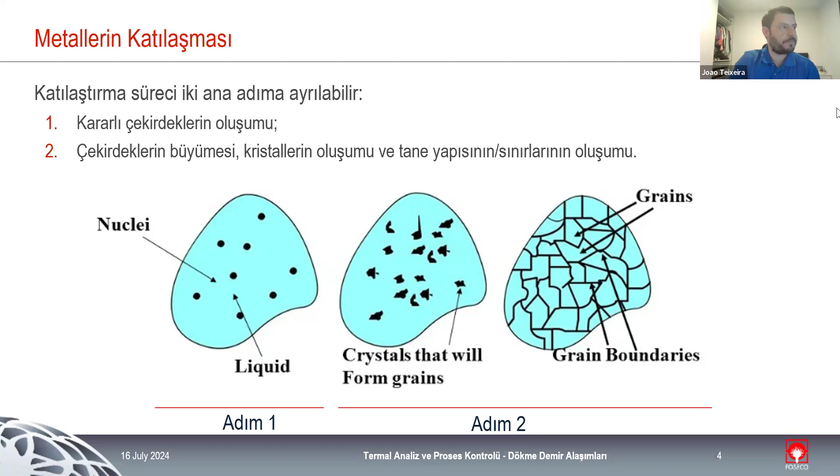And we have two main types of nucleation of stable nuclei. We can have a heterogeneous nucleation. This is what we are trying to achieve with the use of inoculants. So basically, we are giving the liquid metal the stable nuclei for the nucleation to start. What inoculation does to the liquid metal is add points of solidification for the stable nuclei to start to grow. This way, it's less energy consuming, and we can achieve a solidification in less time than if we don't have any type of inoculation.

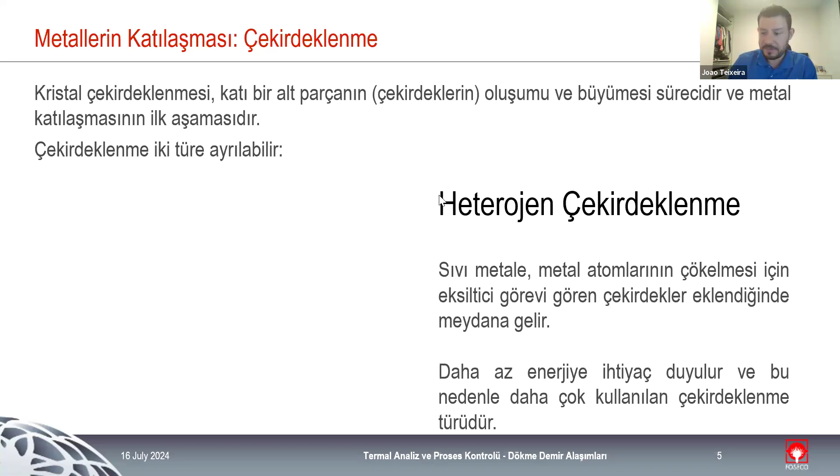The other type of nucleation is called homogeneous nucleation, and this one is achieved when we don't have any type of inoculation. So when you don't give anything for the stable nuclei to grow to the liquid metal, and we just give time for the solidification to happen, this type of nucleation takes a long time. Normally, we don't like this because, as mentioned, it takes longer time, and we have a lot of problems associated with this, especially with the presence of carbides. So again, it's a second part of the importance of inoculation.

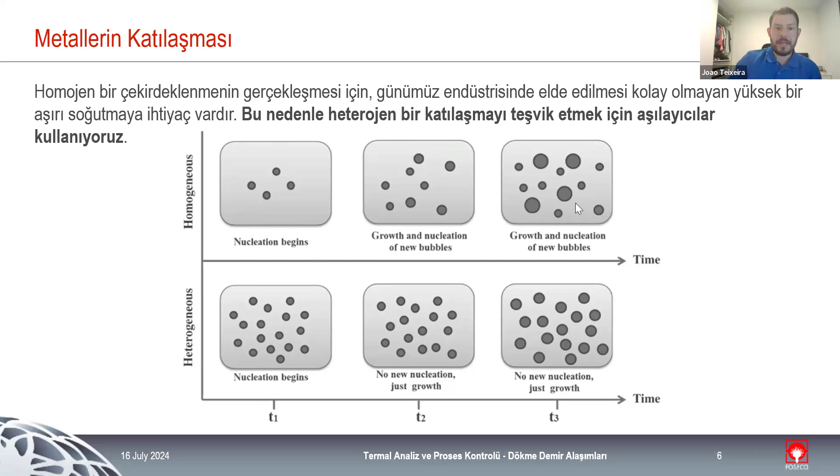It is to achieve a quicker solidification by adding stable nuclei for the nucleation to happen, and to allow time for the carbon to transform into graphite and not into carbides. So inoculation has these two different important aspects. And in this image, we can see the big difference between having a heterogeneous nucleation and a homogeneous one. At the end of the heterogeneous nucleation, you can see that we have a lot more stable nuclei than at the same time with the homogeneous one. So inoculation is a really, really important step in cast iron production, mainly for the stable nuclei to be added to the liquid metal.

And this is basically the scheme of how solidification happens in the liquid melt. If you don't give anything to the liquid metal, the solidification happens from where it is colder to where it is hotter. So when we pour the liquid metal into a sand mold, a green sand mold, for example, the solidification happens from the boundaries of the sand mold to the center. So it's one direction only. Only at the end, and you can see here in the image, we have what is called equiaxed grains, grain boundaries. So they are not one directional. They are nucleating randomly in the melt.

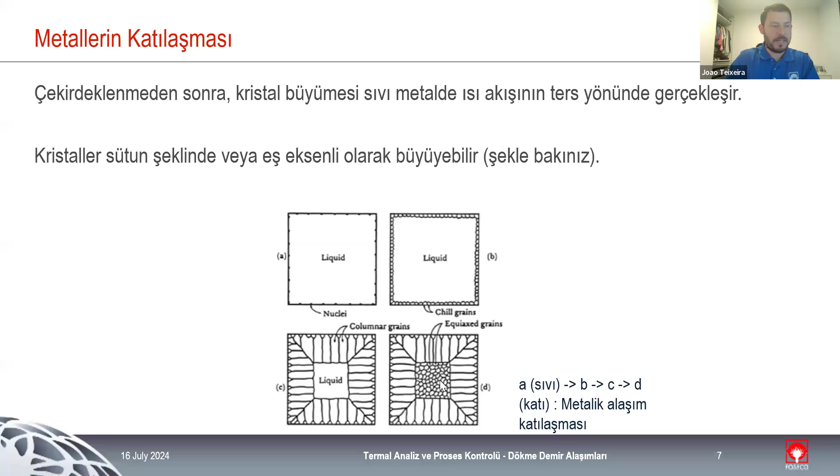The main objective with the inoculation step is to have this type of nucleation happen at random spots inside the mold and not have a one direction solidification of the cast. And this is basically what we have with heterogeneous nucleation. So we are adding an active element, barium, zirconium, aluminium, calcium, bismuth, lanthanum, whichever we are adding. There are some differences that we are going to discuss later on, but we are adding a substrate for the nucleation to happen. And it is basically what we have in this image. We have a substrate and the nucleation happens around the substrate. The graphite particles grow around the stable nuclei that we gave to the liquid metal.

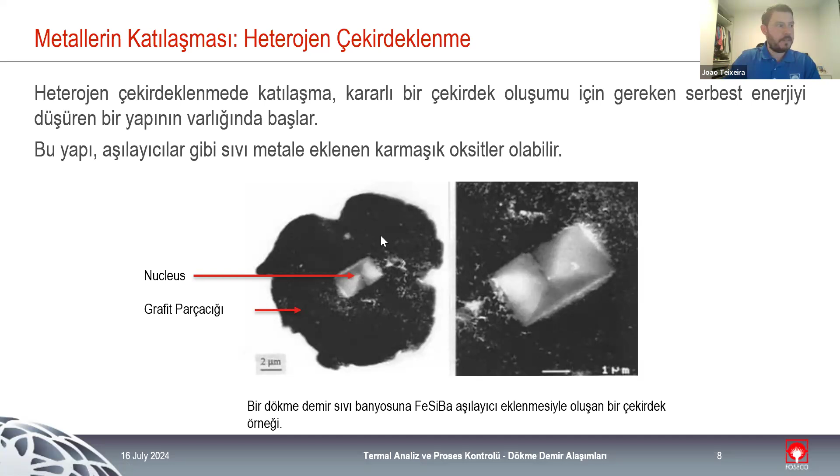And nucleation happens after that. So we have random spots inside the liquid metal with stable nuclei. The stable nuclei start to grow, to get bigger as time goes on, as solidification happens. They start to go against one another. And at the end, we have what I showed in the first picture. We have grain boundaries and we have a lot of stable nuclei growth inside the liquid metal.

What we have here is the scheme for all types of ferrous and non-ferrous solidification. So this type of solidification is the same, either we are dealing with cast iron, aluminum alloys, or brass alloys. The basis of solidification is the same. Stable nuclei, growth, and grain boundaries at the end. And this solidification always happens the same. As you can see here, these are what we call dendrite branches. And these dendrite branches start to go against one another and they start to solidify together. And this type of solidification happens in all ferrous and non-ferrous materials. So it's the same, either we are dealing with cast iron, with aluminum, with brass alloys. The bases are always the same.

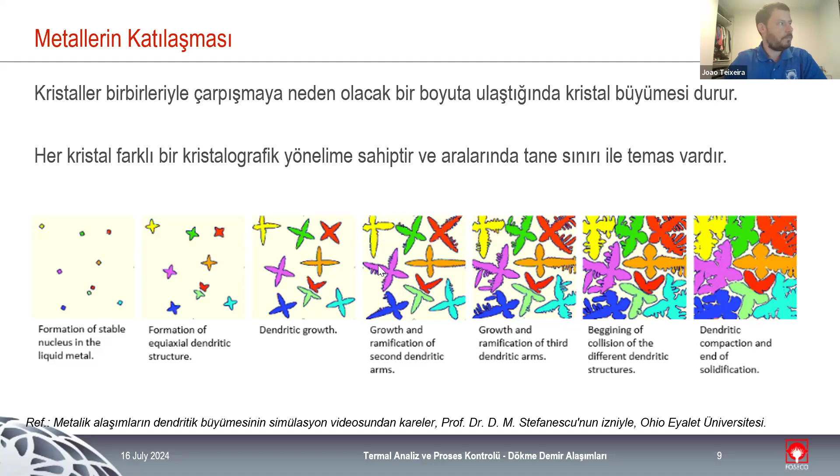Just a quick summary of what we discussed until now before going to the next topic. It is really important to control and to know, during solidification, the chemical composition, because we are adding inoculant agents, we are adding magnesium agents, so we are adding a lot of different chemical compositions to the melt. So we need to have a correct understanding of what we are adding and the effects of what we are adding.

Solidification happens always in the same manner. Formation of stable nuclei. This is helped with the inoculation process, the inoculation step, because we are adding active elements to help the formation of stable nuclei. Stable nuclei grow. They start to go against one another and to form crystals and to form the grain boundaries, grain structures that we see in the microscope when we polish a sample and we go to a microscope to have a metallurgical analysis.

And basically, we have two types of solidification. Homogeneous solidification, where we don't do anything to the melt, so we don't help the melt with inoculation. So the solidification happens during time, it's less effective. And the heterogeneous nucleation, where we help the melt with the addition of inoculants. And this was just for us to remember some concepts and to align some general concepts of solidification.

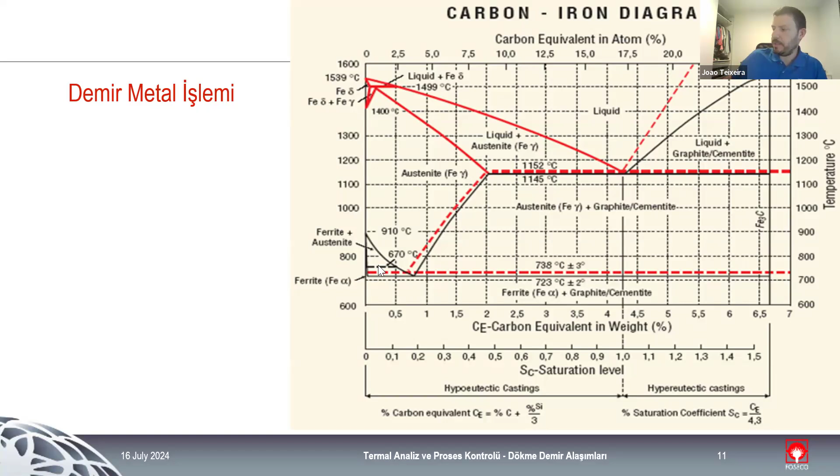So basically, to start, all of us know the definition of a ferrous alloy, but we are going to start here with the basics. We are dealing with cast iron, and cast iron is a ferrous alloy. Most of the main component of a ferrous alloy is iron. However, cast iron is a really particular type of material, because even with iron being the main element present, we have a significant amount of carbon as well. So what we call cast iron is basically iron and carbon.

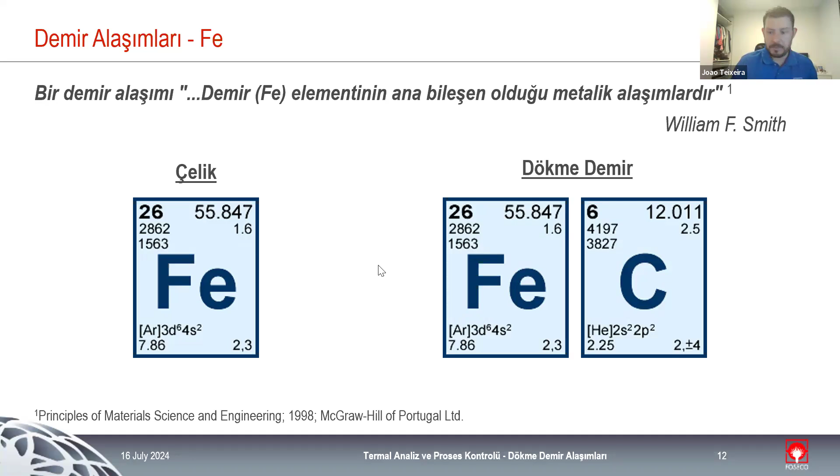In opposition to steel. Steel is mainly iron with a low percentage of carbon. So if we are dealing with cast irons, we are always dealing with the relationship between iron and carbon. And one of the easiest ways for us to understand the relationship between iron and carbon is by studying the phase diagram. And the phase diagram is basically a graphical representation of the physical states or phases that change under temperature and under pressure and under chemical composition.

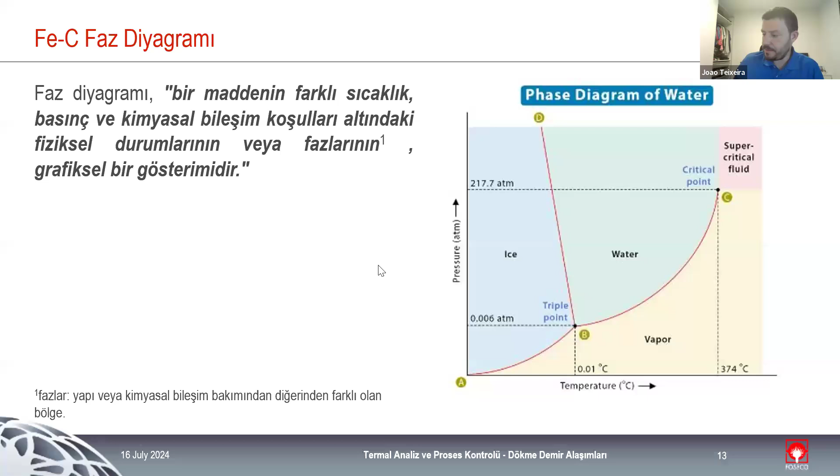So in here we have the most simple one that we have, the water phase diagram, and you can see all the different stages of the water, either gas, liquid, or solid, in the 2D phase diagram. And for carbon and iron, it is basically the same. We are having a representation of all the different stages depending on temperature, pressure, and chemical composition of cast iron. And we have a couple of important spots to know and to discuss.

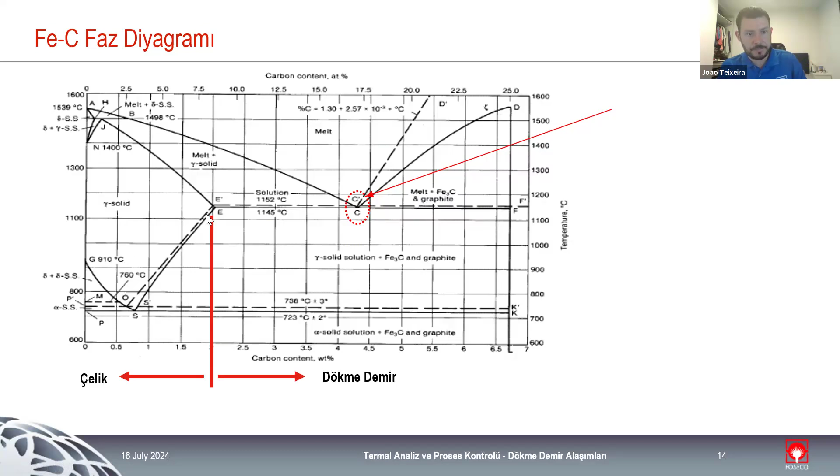One of the main ones is the point where we differ between steel alloys and cast iron alloys. As we discussed, steel is basically iron with a low percentage of carbon, and the separation is around 2% carbon. So everything lower than 2% carbon is considered steel, so it's not cast iron, and we are not going to discuss it here. Everything to the right of the 2% carbon is considered a cast iron. So this is a really important point for us to distinguish between steel and cast iron.

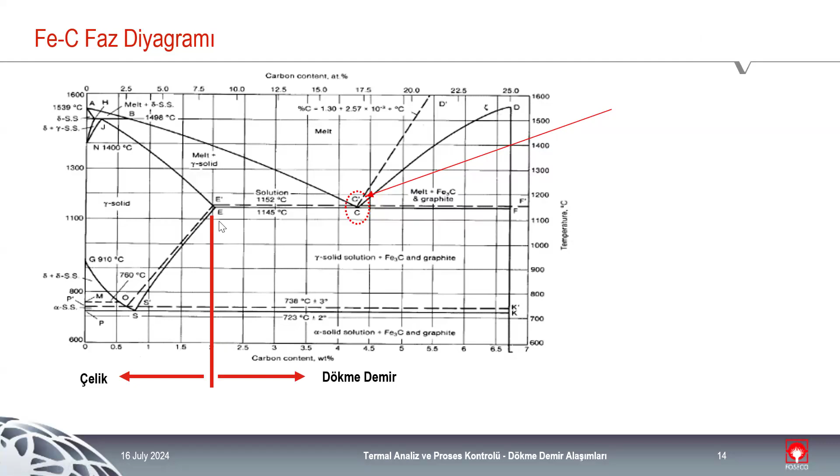And another important point is the eutectic point that we have at 4.3% carbon. This is the point of separation between the three different solidifications that we can have with cast iron. We can distinguish cast iron, and again, this is the same for graphite, for gray, compact, and nodular. The concepts are the same.

We can distinguish the solidification type based on the amount of carbon that we have. If we have 4.3%, we have the eutectic point. We call it a point, but in reality, it's more of a smaller area. It's not considered a point, but for easier explanation, we call that a point, around 4.3%. It's a eutectic solidification. It's the eutectic point of cast iron.

If we have less than 4.3%, we have a hypoeutectic solidification. And if we have more, we have a hypereutectic solidification. And we are going to see that this is really important for understanding the solidification and for understanding the different impacts that we have, especially in the gating system and in the mechanical properties of the cast.

Before going to that, just an overview of some important points of the phase diagram. So everything over this line is liquid. So this is a liquidus curve. Everything over this line is considered liquid. In here, we have a semi-solid state. So we are losing temperature inside the ladle or inside the mold, and we are starting to have a mix of solid with liquid.

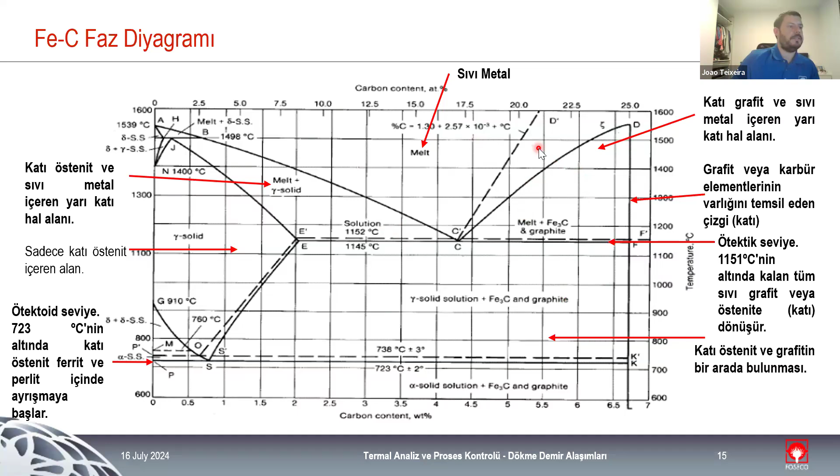And in here, you can see the different steps for the solidification of the different types of cast iron. So for hypoeutectic solidification, and this is, again, with carbon percentages lower than 4.3%. So we are on the left side of the eutectic point. And it doesn't matter if we are really far away from the eutectic point or really close to the eutectic point. The whole area is considered hypoeutectic solidification, with different impacts in mechanical properties and solidification, but it's all considered hypoeutectic solidification.

And we can see that we are going to lose temperature. We have a point here. It doesn't matter the percentage that we are going to have for carbon, they are losing temperature. And when we reach the liquidus temperature, so when we reach the point where we have a mix of liquid and semi-solid state, the first solid phase to form is austenite. So we have liquid metal and we have austenite being formed. And we are continuing to lose temperature. And when we reach the eutectic level, at 1151, 1152, around these temperatures,

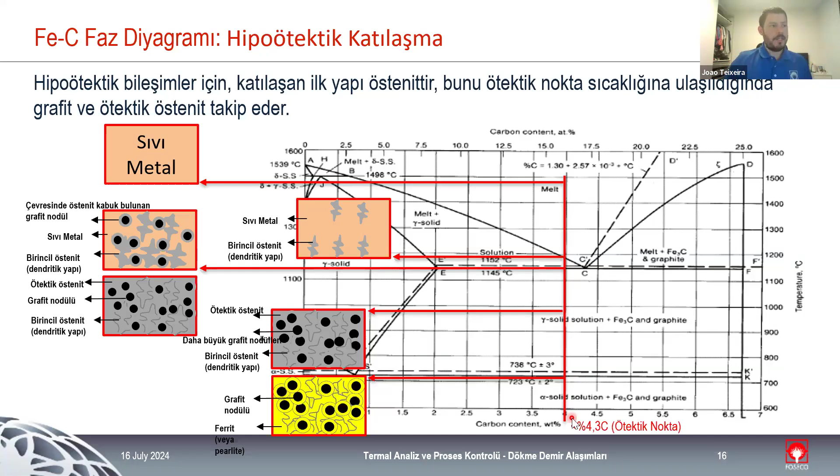we have the start of the graphite phase. So after this point, we have a mix of austenite and graphite being formed. And this is what happens until we have the cast part solidified. And the same principle is used for hypereutectic solidification. So we have a point, we are on the right side of the eutectic point, so we have more than 4.3% carbon. And when we reach the liquidus curve, the first phase to transform is graphite, not austenite.

And this is really important for a lot of different reasons. The main one is for the design of the gating system. When you have a lot of graphite being formed really early during solidification, we have what we see here in this small picture. We have big nodules and we have small nodules. So we have a really quick expansion of the graphite. This is important for some applications where we need this quick expansion of graphite.

But at the same point, we have a lot of problems with this. The main one is that the graphite being less dense than the liquid metal, the graphite nodules, I said nodules because I'm thinking about nodular cast iron, but the graphite being less dense starts to go to the surface and it can block the gating system.

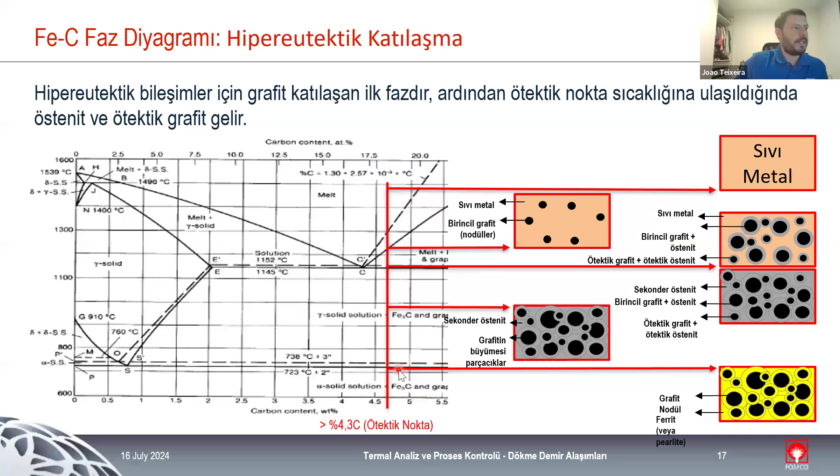And the last stage, that is a mix of hypo and hypereutectic. It's when we have what is called eutectic solidification. So when we are really close to the eutectic point, and again, we call it the eutectic point, but it's an area, a small area around the eutectic point, around 4.3%, and austenite and graphite grow almost at the same rate. Most of the applications tend to look at this type of solidification because we have the best of both worlds. We have the expansion of graphite and the solidification of austenite happening at the same time. So to counteract some problems like shrinkage and porosity, normally this is the type of solidification that companies try to achieve. It is not easy because it's a smaller area

to control. So the chemical composition needs to be really, really controlled. But normally it's what the companies try to achieve in most of the casts. So these are the different types of solidification that we have with cast iron.

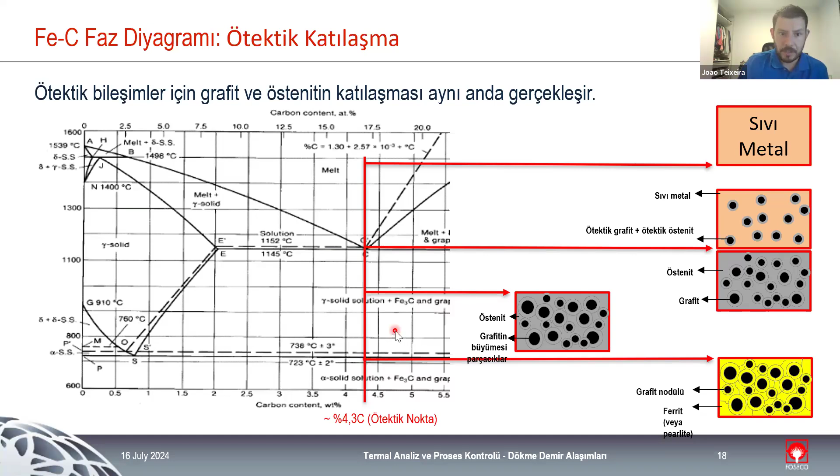And as already discussed, this is not the only thing that we need to understand during solidification, because we are going to add a lot of different chemical agents, chemical alloys, to the melt during solidification. If we are dealing with compact and nodular, we are going to add magnesium to change the shape of the graphite. But whether we are dealing with gray, compact, or nodular, we are going to add inoculants to try to promote the transformation of carbon into graphite. So we have both treatments happening.

Ferrosilicon magnesium to modify the structure of the graphite particles, to go from gray to compact to nodular based on the amount of magnesium that they are going to add, and inoculant with active elements to promote a stable solidification of carbon. And the stable solidification of carbon is basically allowing carbon to transform into graphite and not to transform into carbides. Most of the cases where we find carbides in the cast, it is because the inoculation process failed at some point. Either it was not enough to allow the transformation of carbon into graphite, or it wasn't strong enough, so we need a stronger active element like lanthanum or bismuth, or we have problems with the design of the gating system, and there are some areas of the cast that are isolated and don't receive enough liquid metal to transform the carbon into graphite.

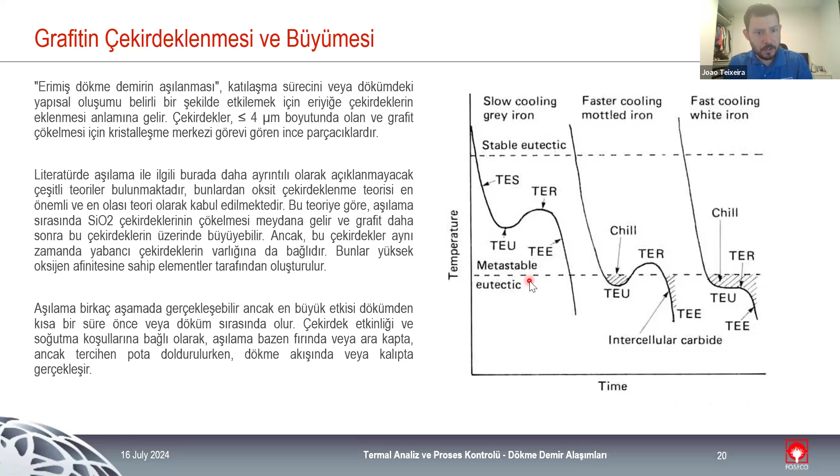Because even if the inoculation step is really, really good, if you have a good inoculant agent, but we have a high amount of these elements, we'll probably have a lot of carbides, because the affinity of carbon is really high with this type of elements. So it's easy for carbon to go and grab these elements that are free in the melt. So we need to play with both areas, with a really good base metal, with a low amount of these trace elements, and choose the correct inoculant for the process that we are going to have.

And this is basically what inoculant is. It is a ferrosilicon alloy with some active element, with some barium, aluminium, calcium, manganese, zirconium. As with everything in life and everything in cast iron production, some elements have good effects. After some time, they lose the effects. They have a quick fading time, like bismuth and lanthanum. They are really good for late stage inoculation, but they are not so good for early stages, for ladle inoculation. We have the universal inoculant with barium, with zirconium.

So there are dozens of different inoculant agents in the market, and all of them have some positives and some negatives, even if it is the price, improvement of mechanical properties. Some inoculants are more specific for gray iron, for example, with the strontium ones. Lanthanum is really good, but as mentioned, the fading resistance is lower. Cerium is really good, but in some particular cases, it could be harmful to the production of nodular cast iron. So we really need to play with all the different types of inoculants that we have, and we need to be careful with the ones that we choose, because there are dozens in the market, and most of them have different applications for production.

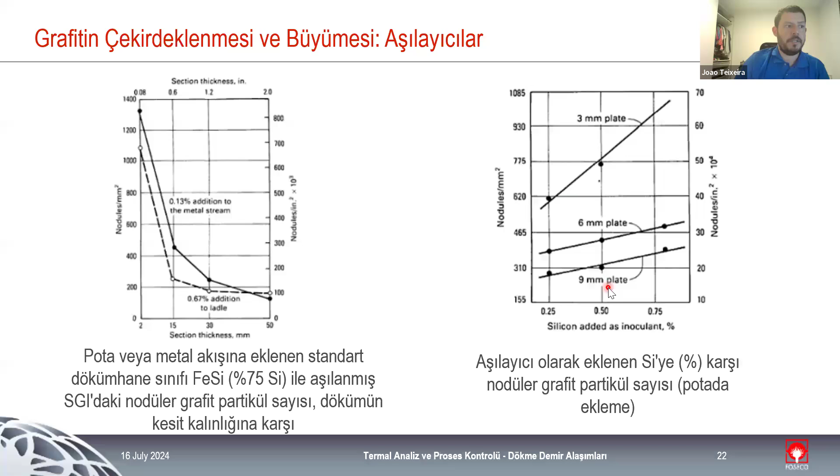And the same principle is used for the right picture. We can see that by increasing the silicon content, we increase the nodule count. Silicon is really important as an element leading to the inoculation, because it's the element that increases the window between the stable and the metastable temperature. So we can see that even by adding a simple silicon alloy to the melt, we increase the nodule count in three different sections of the cast.

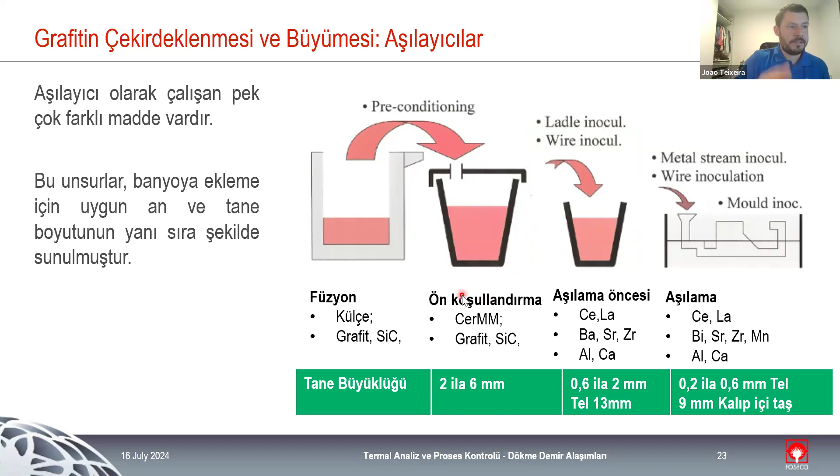We can do wire inoculation. It's a type of ladle inoculation. The only difference is that the inoculant is wrapped in a thin steel, and we have late inoculation. Could be metal stream inoculation with MSI that we are going to see further on, or in mold inoculation. And we can see the different elements that we are going to have in the different stages of inoculation. Again, ladle, in-stream, or core wire.

And for example, for in-stream, we have the MSI unit. Normally, in-stream is really popular, especially for the automotive industry, for the production of smaller casts, where we really need a lot of speed and a lot of production capacity. And it is an easy system for us to have a high replicability of the process. So we are always having the same amount of inoculant. So we can compare one cast with another on the basis of the inoculation, because we are always having the same amount based on the amount of metal that we are pouring to the mold.

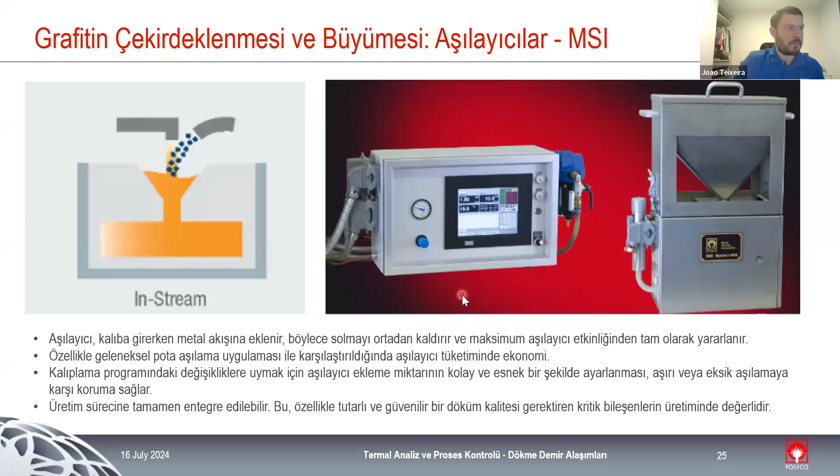This is an example of the MSI unit that Foseco commercialized, and it's really popular, especially for the automotive industry.

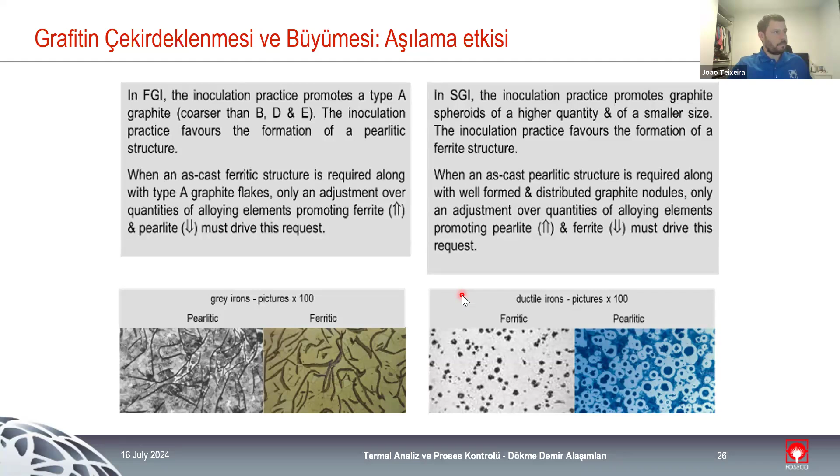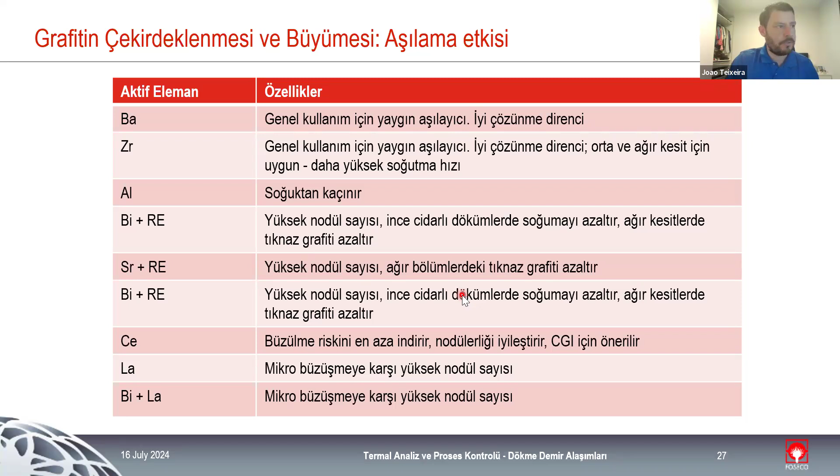And in here, we have the main active elements for inoculants. There are some other elements that are not present here, and there could be a lot of playing between one and the other, but basically it's barium, zirconium, they are the universal ones, aluminium. It's also used in 99% of the inoculants. Aluminium is really important because the crystal phase of aluminium is the same phase as for graphite, so it's easy for graphite to grow on top of aluminium crystal phase. Bismuth, rare earth, strontium ones that are really used for gray, cerium, lanthanum, and then a combination of different active elements. Bismuth, lanthanum, bismuth, rare earth. We can play a lot with this, and again, we have dozens and dozens of different inoculants in the market.

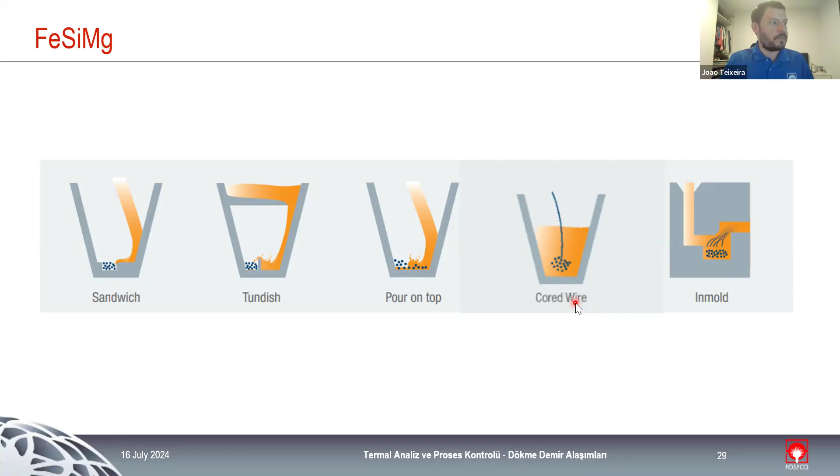This is just for us to understand that everything that we have in the base metal and everything that we had during production will have some effect during solidification. And the other treatment that we normally use for cast iron, in this case only for compact and for nodular, is the magnesium treatment. And the main ones are the sandwich treatment, simply pour on top, cored wire that is really popular at the moment, and in-mold

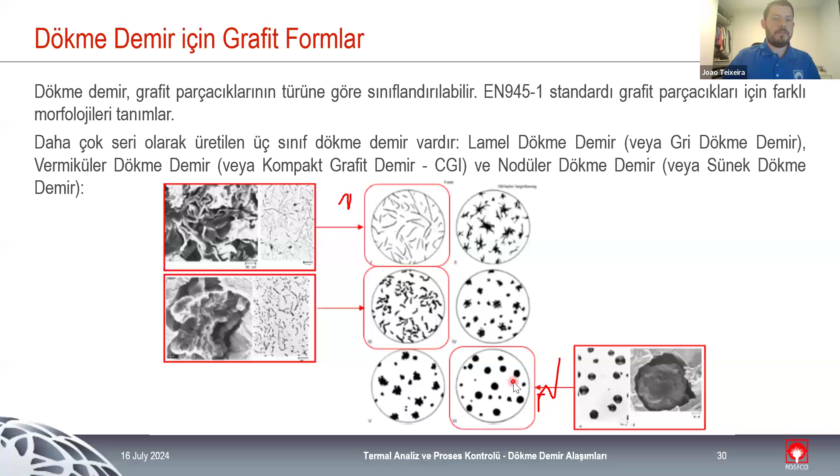nodularization. And the main goal of this step is to change the structure of the graphite. So we start with the gray structure, with the fine lines, worm-like structure of graphite. And each time we add a small amount of magnesium, we change the structure of the graphite, and we go from a worm-like structure to a nodule structure. And we can see here that this is done by adding magnesium. So if you have a low percentage of magnesium, you have the gray cast iron that we know.

And when we increase the magnesium rate, we change the structure of the graphite. Another element that is really important when we are dealing with different types of cast iron is sulfur. The sulfur in the base metal is really important because normally it could be higher when we are producing gray cast iron, because sulfur does not impact the shape of the graphite a lot. Sulfur basically blocks the growth of the graphite. But when we are dealing with nodular, normally we want less sulfur. So we need to be extra careful with the amount of sulfur, again, because sulfur is blocking the growth of the graphite nodule. And the magnesium that we add during treatment is basically to catch the sulfur that is in the melt. So if you have a lot of sulfur, we need to increase the magnesium treatment, so we need to waste more magnesium during treatment.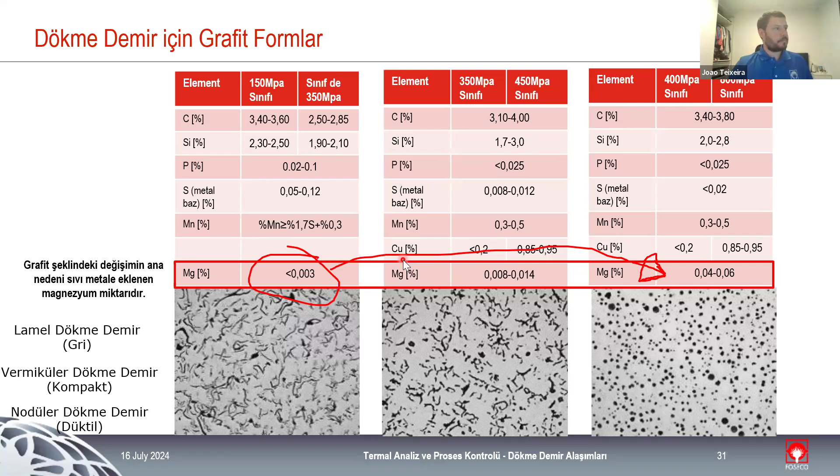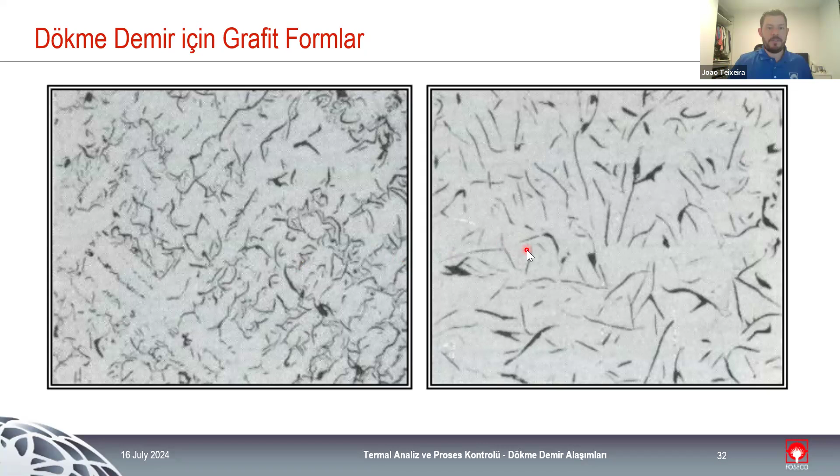This is just an example of the change between the different types of gray iron that we can have, and you can see that on the right side we have more graphite type A, so we probably have better mechanical properties and overall quality of the cast. Here it's just for us to see the difference in tensile strength between gray, compact, and nodular. So we have higher tensile strength with nodular. It's more difficult to produce, but we have more mechanical resistance in this type of iron.

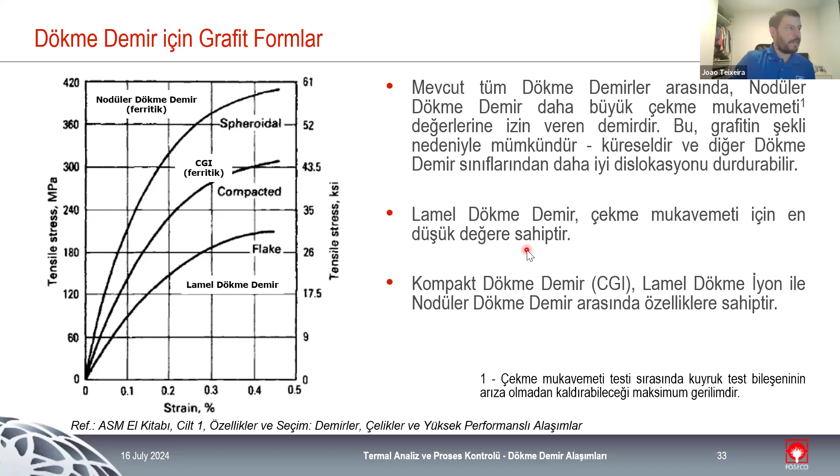And when we are dealing with nodular, we have a parameter that is called nodularity. It's the roundness of the nodules that we have. And the increase in nodularity also improves the mechanical properties. So we can play again a little bit with the alloying elements that we add to try to improve the nodularity. And there is a significant difference in some values of nodularity. So if you really need a high level of mechanical properties, especially for safety components, for calipers, for the automotive industry, for brake systems, for most of the critical safety components that we produce with nodular, we really need to achieve a high level of

nodularity. And some things that we do during the process can drop the nodularity, like the magnesium percentage that is in the melt. Normally we need to be extra careful with the amount of magnesium that we are going to add, because after some point we are going to lose mechanical properties in the melt. Again, the percentage of sulfur, because if we have more sulfur, we are going to need more magnesium, so we are going to decrease the nodularity. And some inoculants can also improve the nodularity of the graphite and the nodule count. Lanthanum, for example, is one that is used a lot to increase the nodule count and nodularity of cast iron.

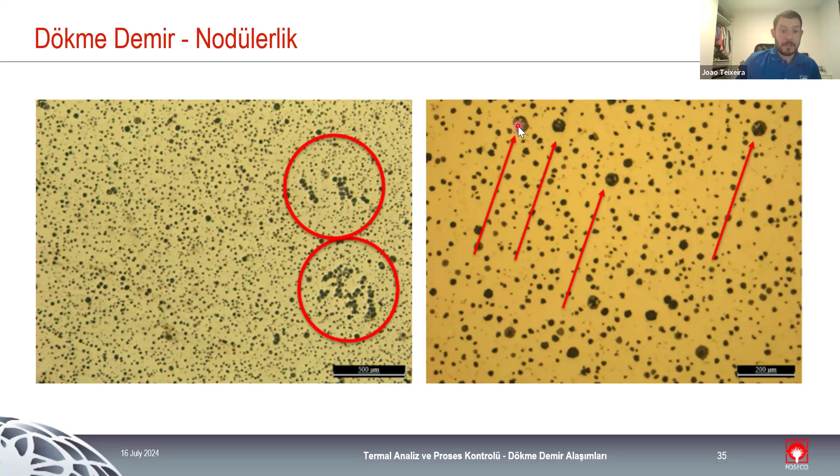And in here we can see just some microstructures of nodular cast iron, and you can see, for example, some problems that we already discussed. In these areas, we have a lot of nodules grouped together, so probably we have really high hypereutectic solidification. So we have a lot of big nodules that grow together, and this could be detrimental for the mechanical properties. And if you look closer, we also can see that we have some problems with the nodules. They are not completely round, but we had some elements that were probably harmful to the growth of the graphite nodule. So again, we need to be extra careful with everything that we add to the liquid metal, because it can affect the mechanical properties of the cast a lot.

This is a quick example of the matrices that we can have with cast iron. We go from ferritic to pearlitic, and the tensile strength increases, but also the number of carbides increase. We need to be careful, especially if the cast is going to be machined.

The main difference between pearlite and pure carbides: pearlite is also iron and carbon carbide, but the difference is that we know the orientation, so it's always in the same orientation, and we artificially promote the appearance of pearlitic structure. When we have pure carbides, like chromium carbides or titanium carbides, they are random in the cast and the orientation is not known, so we can have a lot of problems, especially during machining with this.

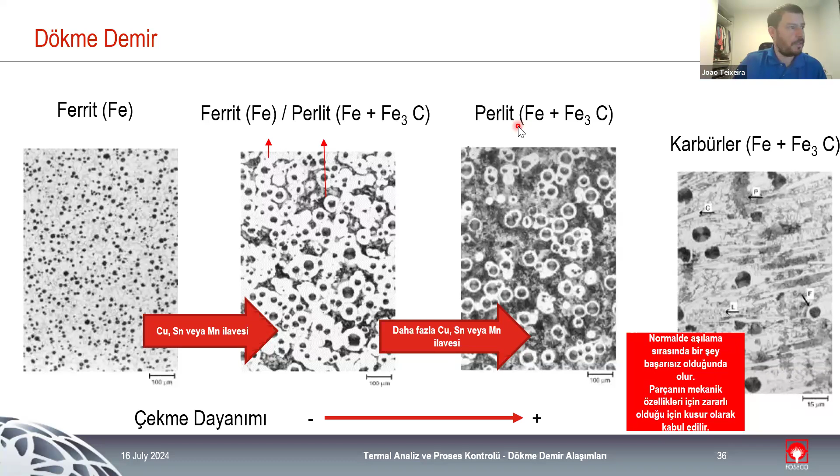You can see here that they are oriented, all the pearlitic structure that we have, normally with the addition of copper and tin in nodular iron. They are oriented, and we know this orientation, so if we add a specific amount of copper and a specific amount of tin, we are going to have a specific amount of pearlite. So we can play with these to improve the mechanical properties without decreasing a lot the machinability of the cast.

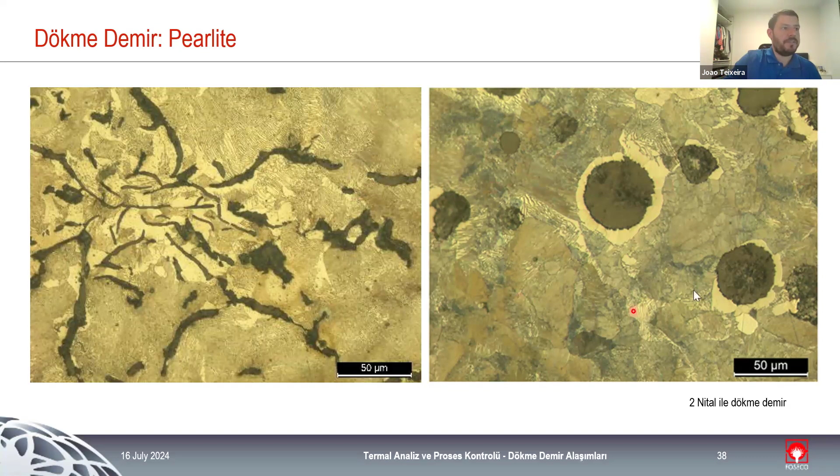This is a sample analysis with pearlite. Normally we need to etch it with 2% nital to have this appearance, but you can see that we have the graphite nodules, we have the austenite around the graphite nodules, so we had a really close eutectic solidification. Both austenite and graphite grow at the same time, so we have a capsule of austenite around the graphite nodule, and you have the pearlitic structure around.

A small summary: the phase diagram is important for us to understand the complex solidification process of cast iron and to identify the type of solidification that we are going to have, whether eutectic, hypoeutectic, or hypereutectic. The main goal of the inoculation step is to promote the stable solidification of carbon and to limit the amount of carbides that we are going to have in the cast.

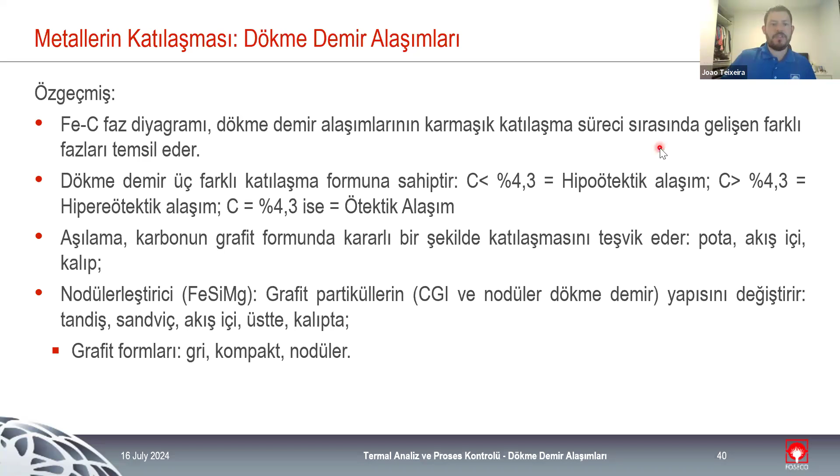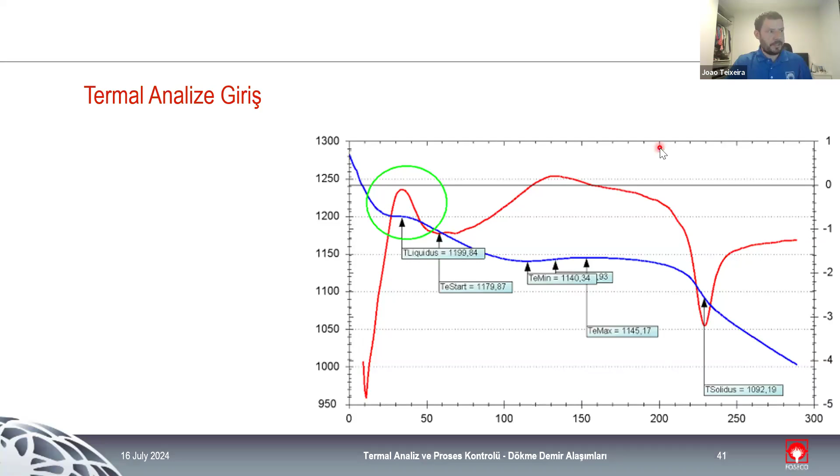The main role of the magnesium treatment is to change the shape of graphite from gray to compact to nodular based on the amount of magnesium that they are going to have. The last part, we are going to discuss a little bit about thermal analysis. We saw the phase diagram, and now we are going to see how we can use the phase diagram with the thermal analysis to determine a lot of different important topics during production.

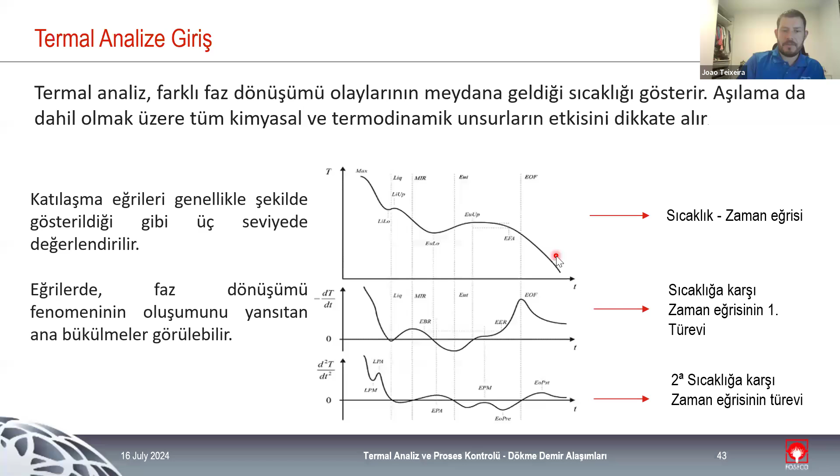Thermal analysis can be used for all types of production: aluminum, copper, ferrous, non-ferrous. It's used in a wide range of alloy production, and it's basically the analysis of the changing properties of a small sample, always related to temperature and time. So all the thermal analysis curves are always a function of temperature and time. We have temperature and time, and the curve is always based on these changes.

For the particular case of Foseco, we use a Ferrolab 5, and it's the system that you see here. The Ferrolab 5 consists of a cup and stand. The cup is where we pour the metal sample for the analysis. The Ferrobox is where we do the conversion of the thermal signal, with the thermocouple type K, to an electric signal for us to have a curve. And the workstation is where we can see the curve.

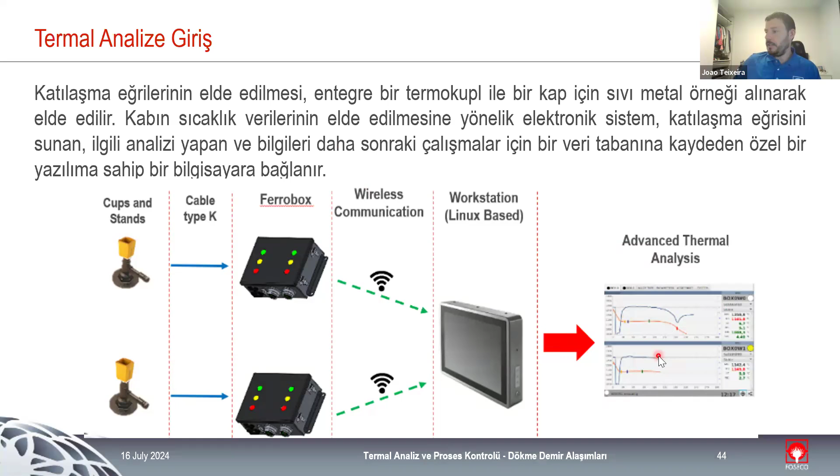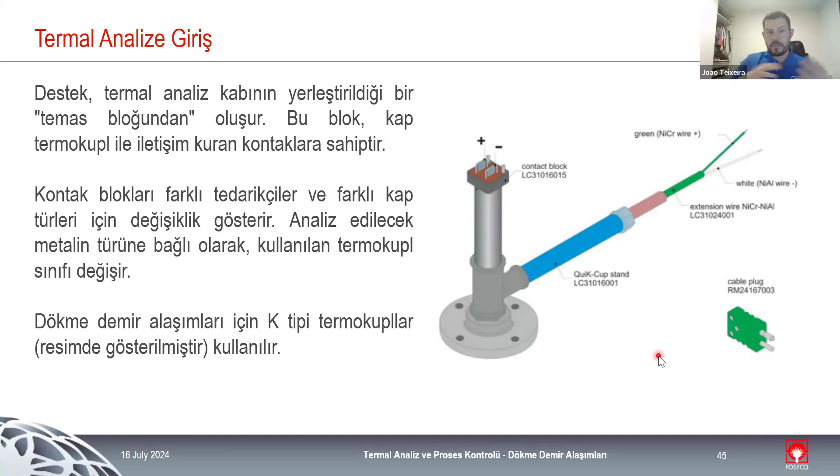The stand is basically a place where we put the thermal analysis cup that connects the thermocouple to the whole system, to convert the temperature into an electrical signal.

Thermal analysis can be used in different stages of production. It can be used in the base metal for us to know the liquidus temperature, the carbon content, the silicon content. Especially the carbon content is really important with thermal analysis, because carbon content is difficult to obtain with a spectrometer.

Because carbon is a non-metallic element, normally a system like LECO should be used to have a really high degree of correctness of the carbon content. It's really hard for the spectrometer to give this value correctly, and thermal analysis can do it really easily, with good replicability over time. For this type of analysis in the base metal, we use cups with tellurium.

The tellurium is there to consume all the carbon and transform it into carbides, to speed up the solidification process. So we don't have anything happening in the eutectic, we get a straight line, and it's easy for the system to identify all the different spots that it needs to identify. During production, after magnesium treatment and after inoculation, we want to see the changes in the melt with these production steps, so we use cups without anything.

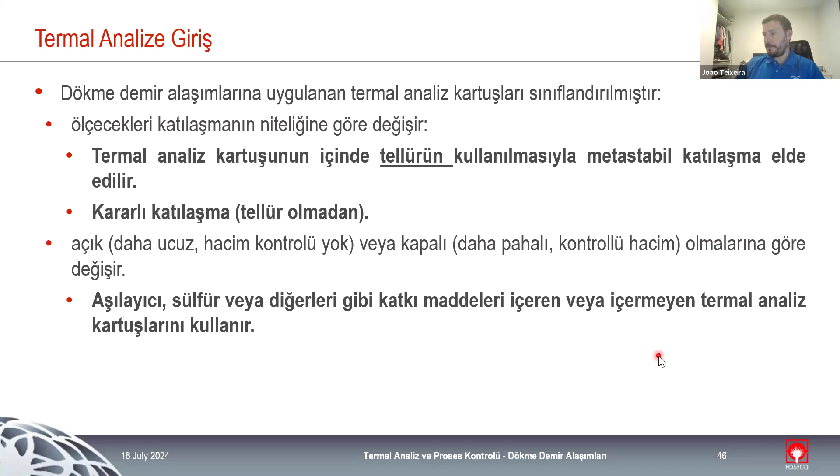And again, we have the phase diagram, and I just want to point out that we are always talking about carbon content, but in reality, and as we already discussed and you are all aware, we have a lot of other elements that are present in the melt, especially silicon. After carbon and after iron, it is the element that we have in higher amount in the melt.

So for the study of the phase diagram and thermal analysis, we change the carbon content for what is called the carbon equivalent. That is a mix of carbon plus 1/3 of the silicon content. And we use this value to determine the point in the phase diagram that we are at a given time, either at production or in the base metal.

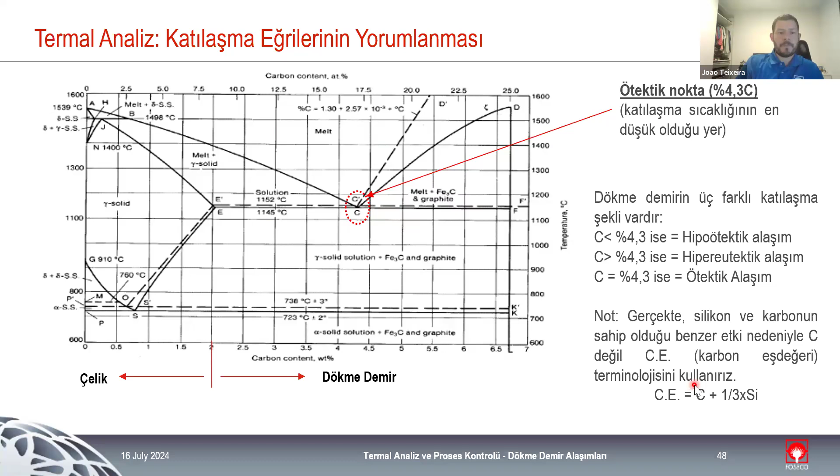And we can see here that the thermal analysis is basically mimicking the phase diagram. So every time we cross a phase in the phase diagram, we have a correspondence in the thermal analysis. So we change from liquidus to semi-solid state, we have an inflection. We reach the eutectic line, we have an inflection. So every time we have a phase transformation in the phase diagram, we have the equivalent in the thermal analysis. So we can always know where we are at a given point.

And the curve is basically this. We have the main curve, temperature and time. The blue one is the first derivative. The first derivative is, every time we have an inflection in the main curve, we have a zero, so we have a change of direction in the first derivative. It's just for us to have higher control of the points where some changes happened.

For example, here we reach liquidus temperature and we have a change in direction. We achieved the minimum temperature. We have another change in direction. And you can see all the different parameters that we can control with thermal analysis. In this case, because we have a eutectic minimum and maximum, this curve was taken after production, so with the cup without tellurium. And we have values for the magnesium treatment, if we are dealing with that, or the inoculation treatment if it was done.

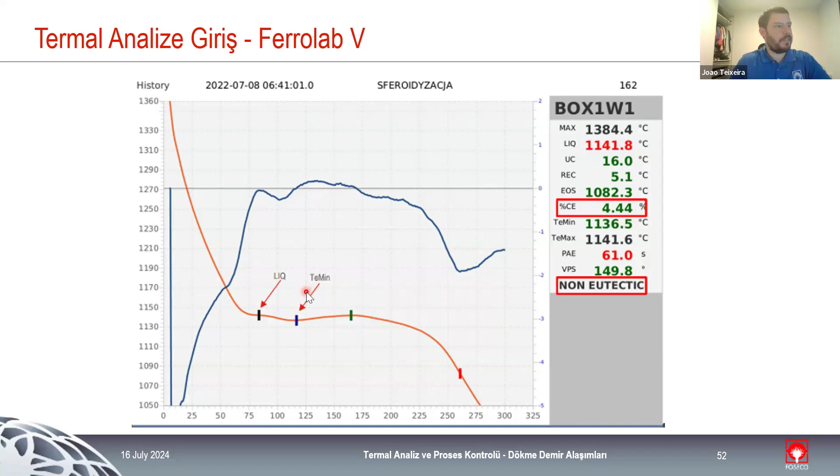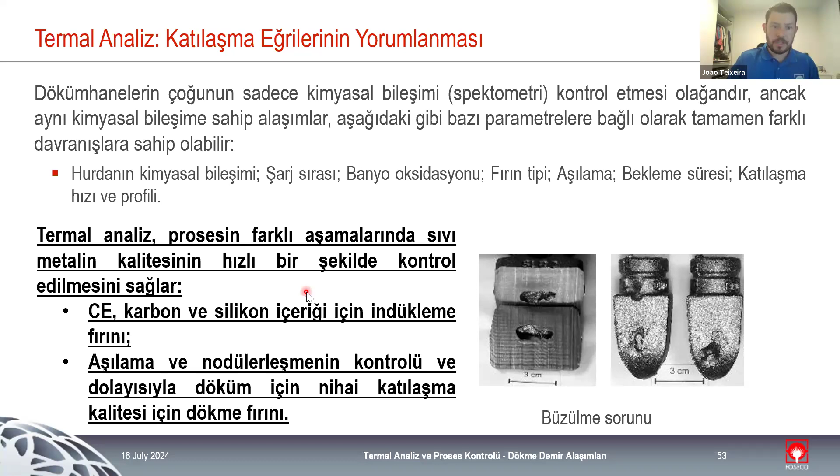This is just a resume of what we discussed: we use thermal analysis in the melting furnace to control the carbon equivalent, carbon and silicon, and the liquidus temperature, to know which point of the phase diagram we are at and what type of solidification we have. And after treatment, you use thermal analysis to know the inoculation effect and nodularization effect of the process.

We already discussed this, but in this part we have the graphics. For metastable, so with the cups with tellurium, the main objective is to only know the carbon content and the silicon content. So we consume all the carbon in the sample. We don't allow the carbon to transform into graphite. So we have a straight line at the eutectic point, as you can see here. So we don't have any type of transformation affecting the readings of the system.

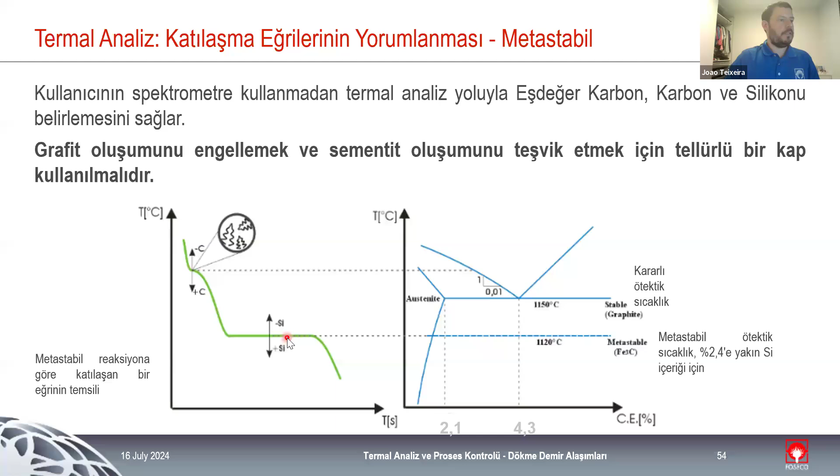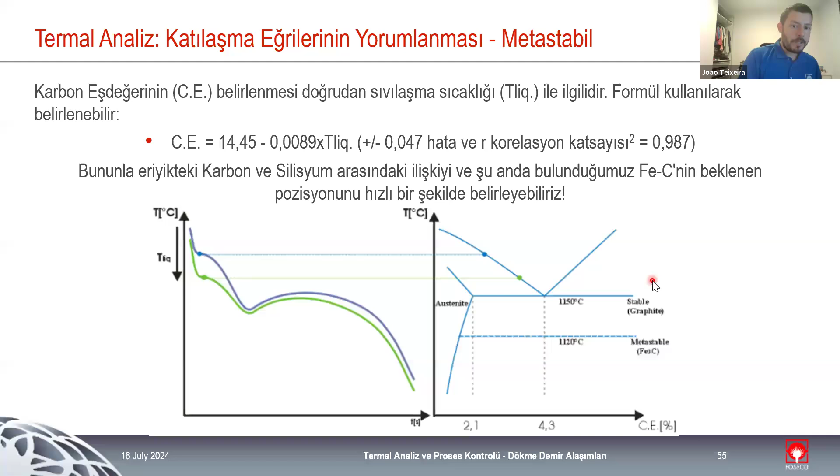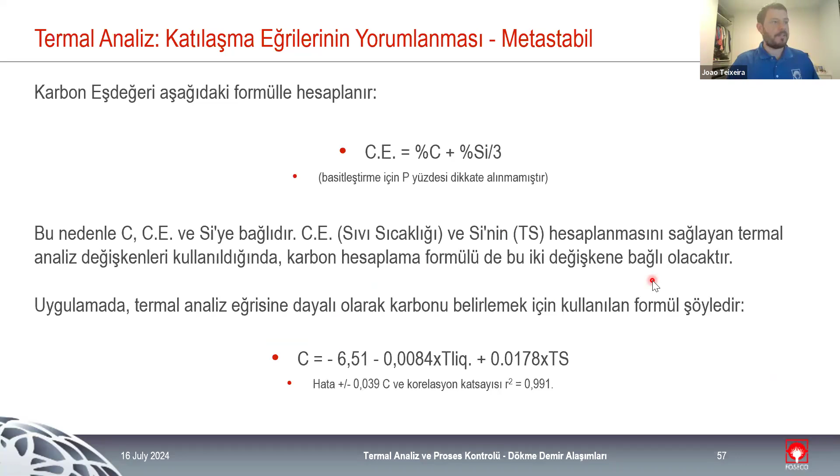This is just for us to understand that we can determine the differences in carbon content with thermal analysis when we are dealing with the metastable solidification. And this is just a formula for silicon. It is dependent on the metastable solidification. The formula for carbon equivalent that we already discussed, and the formula for carbon that is dependent on the liquidus temperature, as we discussed two slides before. And in here, it's just for us to see that the different points in the thermal analysis represent different points in the phase diagram, like we discussed already.

When we are dealing with the stable solidification, we have the three types of solidification that we already discussed: hypoeutectic, eutectic, and hypereutectic, and each one with differences in the phases being formed first. Hypoeutectic with austenite being formed first, and the graphite being formed at the eutectic. The eutectic point, where the graphite and austenite form at the same time, so the inflection that we have at the eutectic is bigger because we have both phases being formed at the same time.

And the hypereutectic solidification, where the first phase being formed is graphite and later on austenite. And you can see that the curves are slightly different, especially the hypereutectic, because we normally have two big inflections. The first big one with the graphite being formed at early stages, and a second smaller one with some graphite still being formed and austenite at the eutectic level.

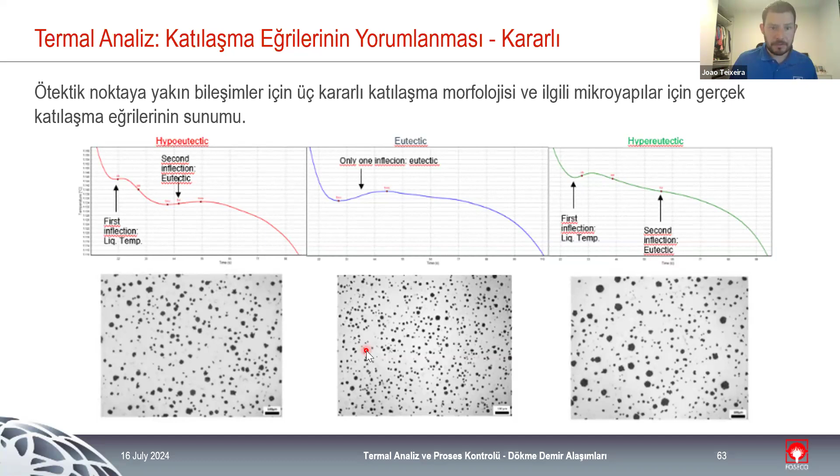The main difference between hypo and eutectic is, in this case, the nodule density. We have more nodule density at the eutectic phase because it happens in a single area, and it's not a mix of different points where the solidification of graphite happens. So we have a higher amount of nodules being formed in a single phase.

And again, this is just for us to have an idea that different elements promote different types of solidification and affect differently the metal that we have. We have strong graphite promoters, so elements that are good for the transformation of graphite: silicon, as already mentioned, aluminium, as already mentioned again. We have elements that are not good for the formation of graphite, like phosphorus and arsenic. So we need to manage and we need to control these elements really carefully in the base metal.

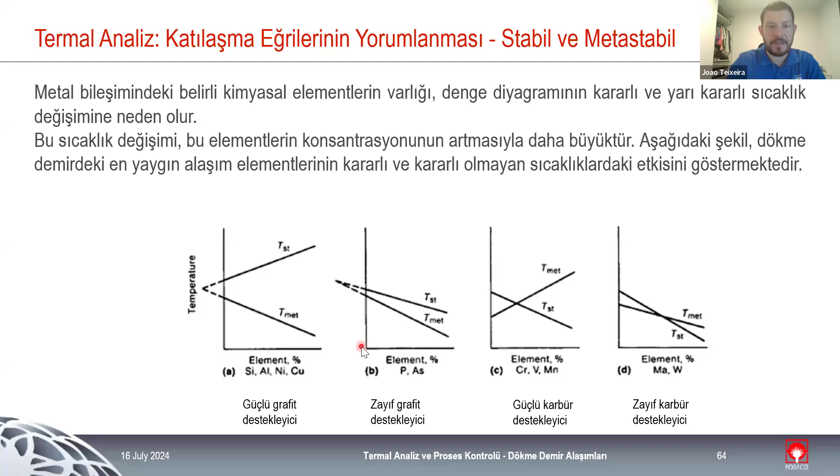We have the carbide promoters, chromium, vanadium, that have a high affinity with carbon and can steal the carbon and transform carbon into carbides. And we have weak carbide promoters like tungsten and other elements that carbon does not have a high affinity with, so they don't affect the ability of the carbon to transform into graphite.

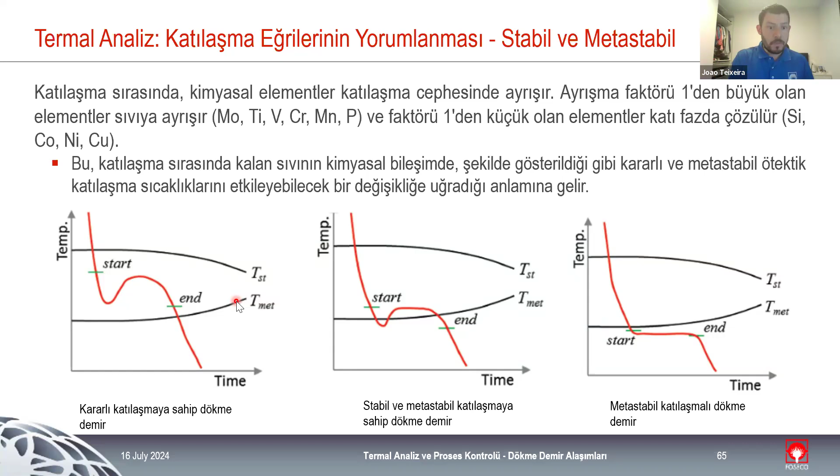And this is just for us to see in more detail the difference between the stable and the metastable temperature. It's between these temperatures that the inoculation step happens and the nodulization step happens. So it's really important for us to control how we achieve both these temperatures in production, and to understand that most of the treatments that we do should happen between these two temperatures. So we need to monitor them, and thermal analysis is really good for this. And we need to control the elements that we are going to add to the melt.

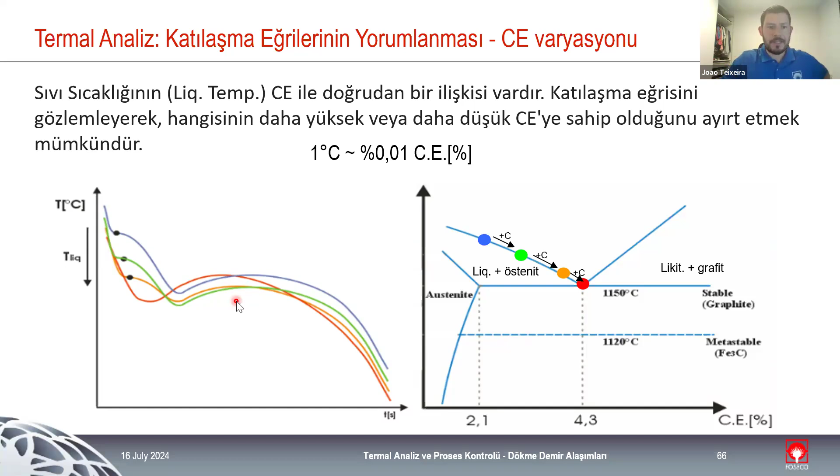And this is just to show that this is really important, especially for production, when you are moving a ladle from one side to the other to pour it into the sand molds. Each degree that we lose in temperature, it's 0.01% carbon equivalent. So we are losing carbon each time the temperature drops. So we need to also control really, really carefully the temperature when we are producing. This is, again, just for us to know the different elements and the effect that they have.

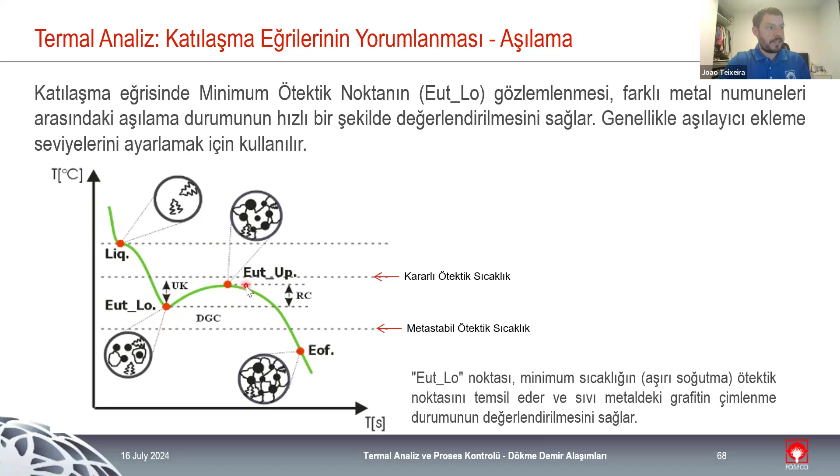And we can see that even a small amount of inoculation is enough to transform a lot of carbides into a lot less carbides. So we push the eutectic minimum from 1125 to 1139, and we improve the inoculation step and the ability of carbon to transform either into graphite or carbides. We improve this with a small amount of inoculation. This is just the importance of the eutectic minimum that we are discussing so far.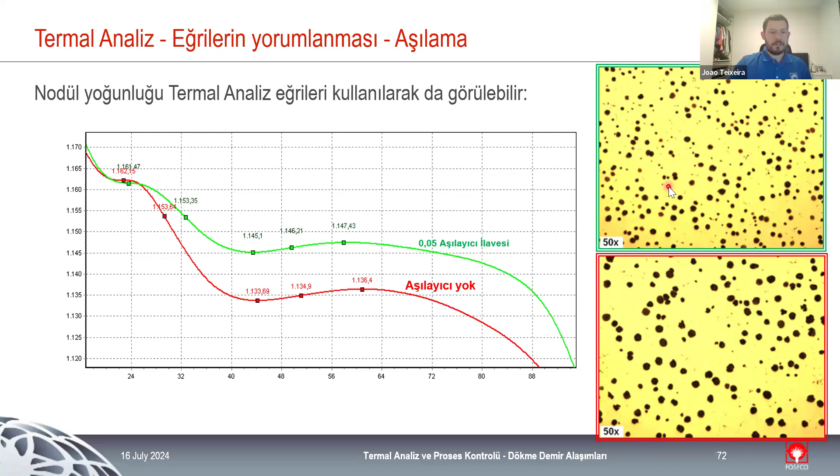And in this particular point, lanthanum, cerium, for example, bismuth, they are really important because they are really, really strong nodule density promoters. And normally when you need to increase the nodule density, and by increasing nodule density, normally you increase mechanical properties. These are good examples of inoculants that we should use.

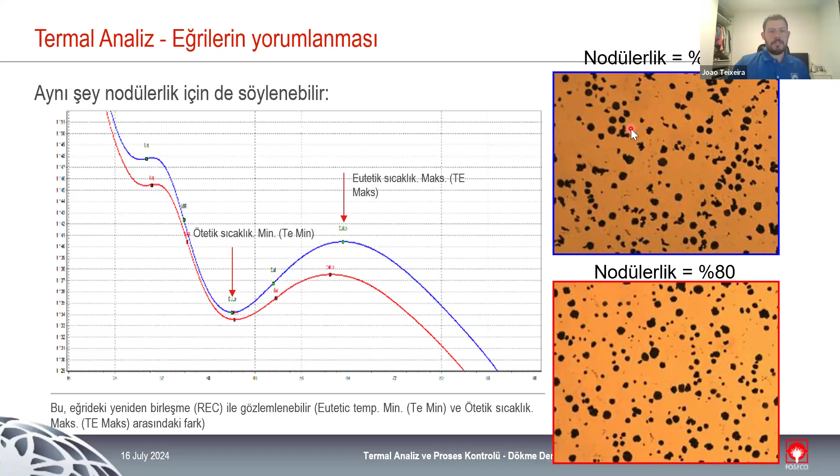And another important aspect of nodular production is the nodularity and the control of the recalescence, the difference between the eutectic minimum and maximum. And you can see that when this recalescence is lower, we have a high nodularity, around 80%. And when it's higher, we have a lower nodularity, around 65%. So recalescence is also an important parameter to control in thermal analysis during nodular cast iron production.

And this is just to illustrate normally the big problems that we have during cast iron production, the shrinkage problems. And shrinkage is basically a small area of the cast part that we are producing that at some point during solidification was isolated during solidification. And it was isolated because of dendritic growth, and we saw that every alloy grows as a dendritic structure. The branches close early on during solidification, and they isolate a small area of the cast.

And we have a shrinkage problem later on because we don't have any liquid metal to expand and to counteract the contraction of the liquid metal. And one way that we can control this is with thermal analysis as well. It's a good indication, and it's a good tool to study the dendritic growth and the expansion of graphite, and of course the careful use of feeders in the casts, especially the big casts.

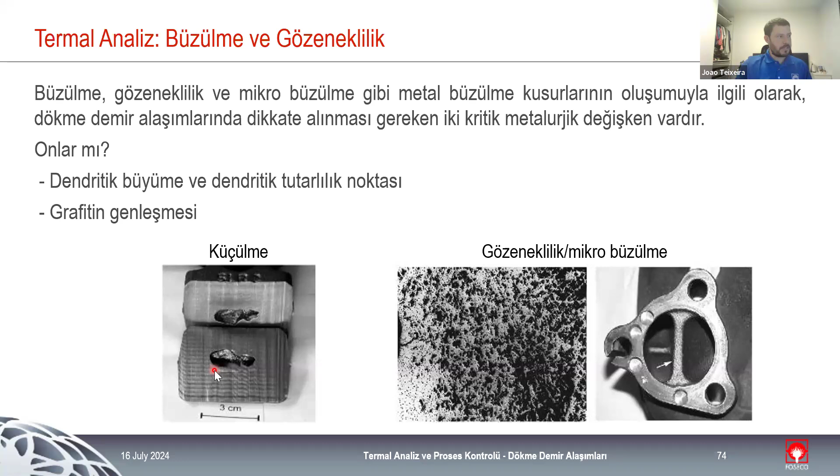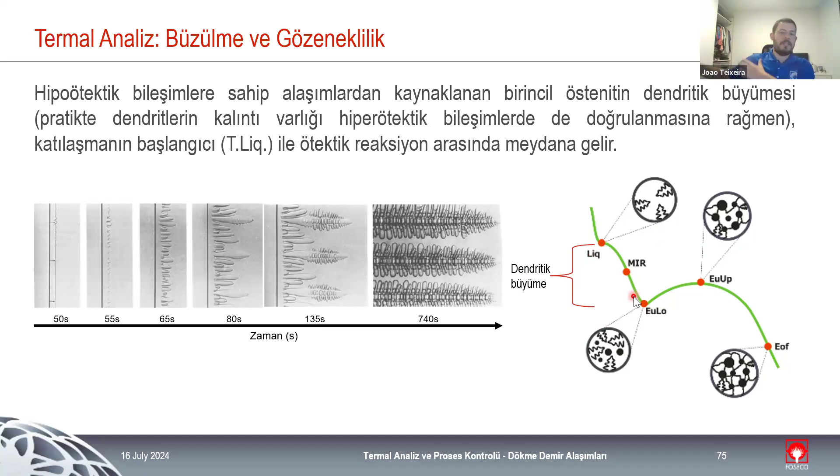And so the thermal analysis is important to control this dendritic growth, because most of the dendritic growth happens between the liquidus temperature and the eutectic low temperature. So this is another thing that we can take from thermal analysis when we are going to study thermal analysis, and when they are going to compare a lot of different production data with thermal analysis.

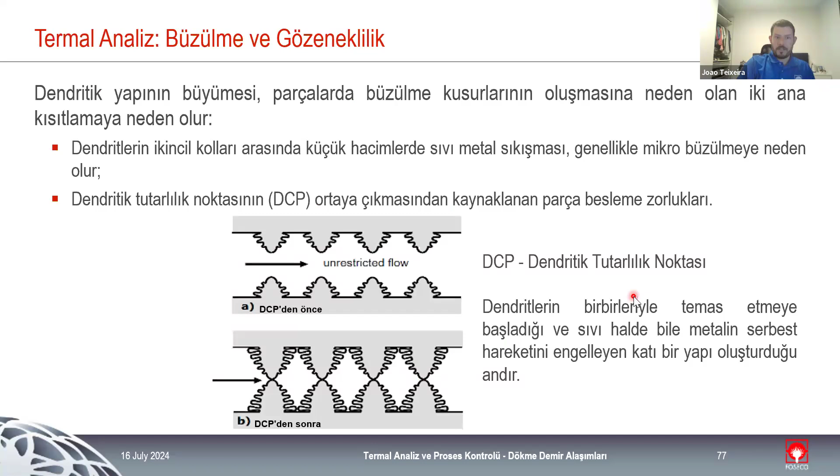And this is just an example of some dendritic structures that you can find on some microstructure analysis. And this is just an illustration example of what is called dendritic coherence. It's the point where the dendritic branches close and isolate a section of the cast, and we have a shrinkage or a micro shrinkage because of this.

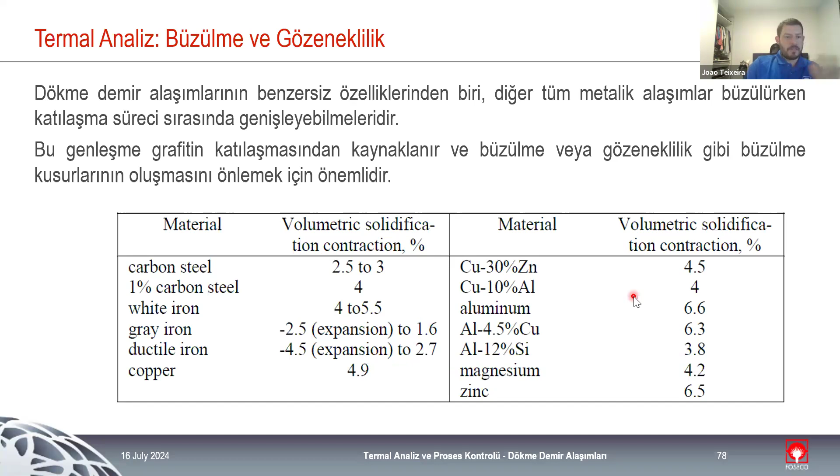Of course, we can counteract this problem in the particular case of cast iron because we have graphite, and graphite is the only element that expands during solidification, and we can use that expansion to counteract the problems of shrinkage and micro shrinkage. If we are dealing with steel, for example, or with aluminum or copper alloys, we don't have anything that is expanding during solidification. Everything is contracting. So we need to be even more careful when we are going to design the gating system and all the systems to feed the die.

When we have micro shrinkage, so shrinkage that is really small, sometimes it's not easy to identify micro shrinkage versus porosity. An easy way to identify is that normally porosity is really perfect. The porosity defects, the holes, are nearly perfect because it was gas that was trapped inside the melt, and the gas exploded at some point, but it's easier for a gas to stay as a perfect round than to stay in a different position. It's less energy for that state. So when the gas bubble explodes, that part was not filled with metal. So it stays a perfect round or almost perfect round shape. And micro shrinkage is everything but perfect. So one of the easiest ways to identify is the shape of the defect.

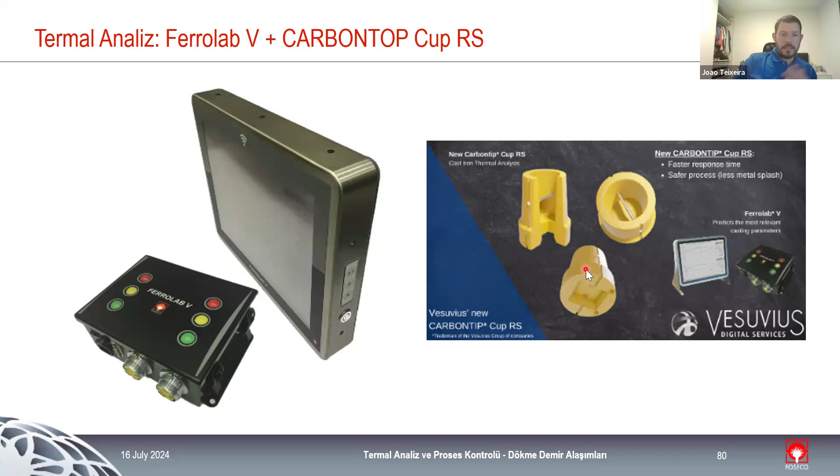And just to finish, this is the Ferrolab V, the system, the Ferro box and the workstation, and the cups that we are using at the moment to have the samples, with tellurium and without tellurium. And this is a small resume of everything that we discussed. So the importance of thermal analysis to understand the physical transformations that happened during solidification using only a small sample.

And it is important for quality control because we can use it in the melting ladle for control of the silicon, carbon, liquidus temperature with the cups with tellurium. And we can use it in production after treatment, after magnesium or inoculation treatment, using the cups without tellurium. And we can check different parameters to check if the inoculation process or the nodulization process was okay, and if you have a good melt to produce and to have sound casts.

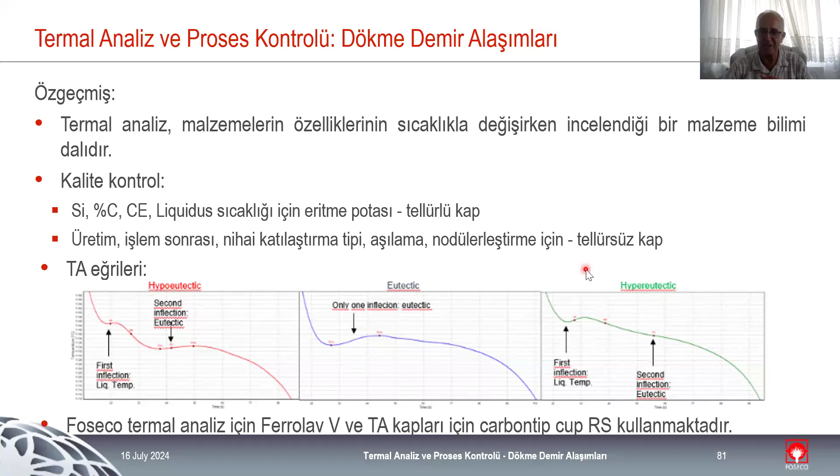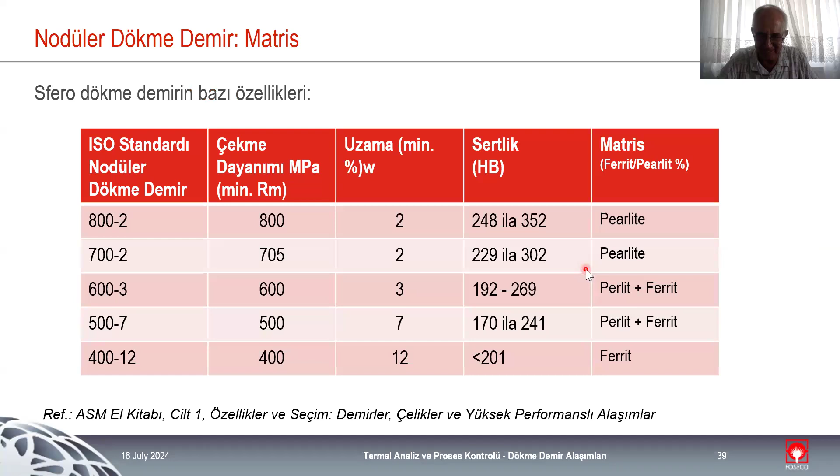Thank you, João. That was really quite an important topic, with too many aspects, so you cannot miss any of the topics. Yes, that is quite understandable. Thank you.

Yeah, we are expecting some questions from the audience, and only a short message came from Alper saying that he has written his email address so that he will be ready to answer the questions which may arise after this presentation.

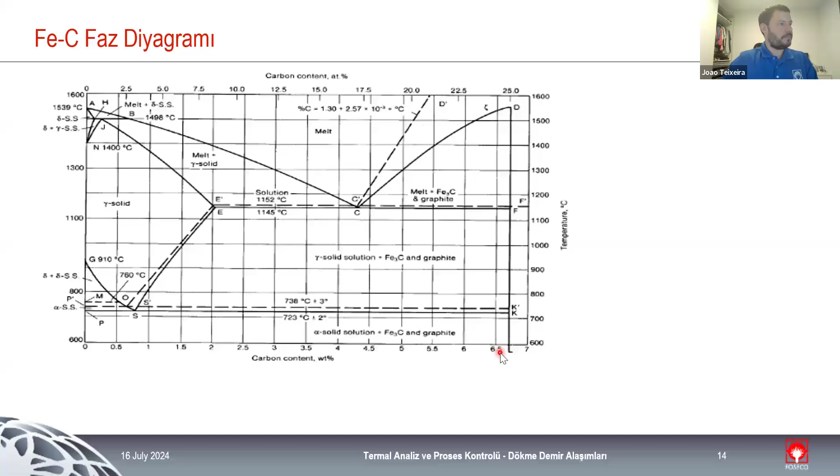Sorry. So there's an extra explanation. It's the same as a VPS. Okay. Yes, thank you. VPS. Thank you. So it's easier like this. So the VPS. Thank you for the note. I was not aware of that. I will just go to one example.

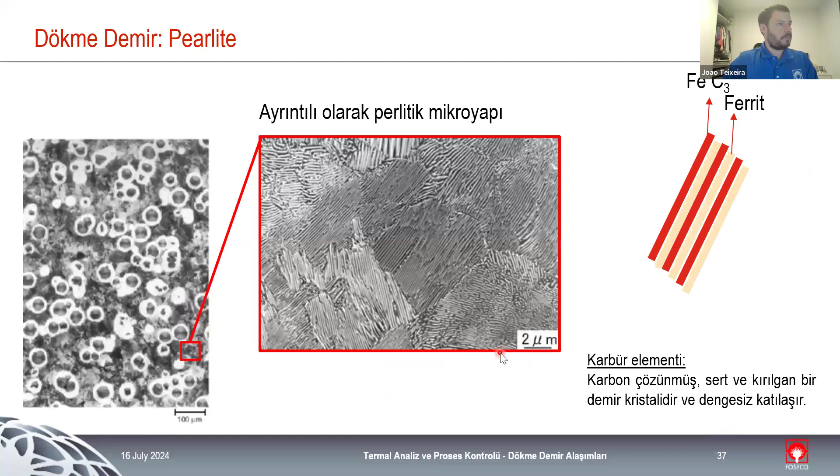So the VPS, as we discussed, is the angle that is formed at the end of the solidification. So it is the angle of the first derivative, and the first derivative is related with the EOS value, with this temperature, the EOS value. So normally with VPS, when it is wide open, it means that a lot of graphite transformation happened at later stages of solidification. So when we decrease the temperature and achieve the eutectic point, we have a transformation of carbon into graphite, and the temperature continues to drop. And at the end of solidification, we still have a lot of carbon in the melt to transform into graphite. And this is not good.

And the main reason why this is not good is that at this point, we already have a lot of austenitic structure formed in the cast. So even if you have a lot of expansion, it's not enough to compensate the amount of austenite that we already have formed. And the graphite should always happen more at the eutectic point to counteract the contraction of the austenite. So the way to improve VPS is by having a better inoculation, to promote an early formation of graphite. So if you have problems with the VPS, normally you have problems with porosity and micro shrinkage or even shrinkage, because you don't have carbon being formed at the stages where the carbon should form graphite. So the only way that we have to counteract this is to improve the inoculation process.

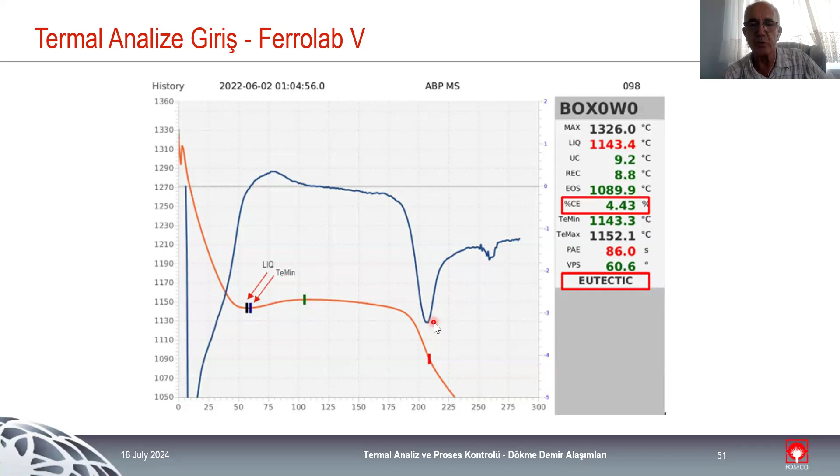When I was working with DISA lines, so probably closer to the example that we are describing, we had really long spoons to catch the liquid metal before it entered the mold. So we catch the liquid metal after the nodularization process and after the inoculation process, and we catch a small sample. But we really needed a long spoon to take it. And we had space for that.

I don't know if it is the case in this example, but if this is not possible, what I can say is that you could try to take the sample from the treatment ladle, and you can try to add the amount of inoculant corresponding to the volume of the cup. And I cannot give you values here because I don't know the volume and the amount of inoculation that we are dealing with.